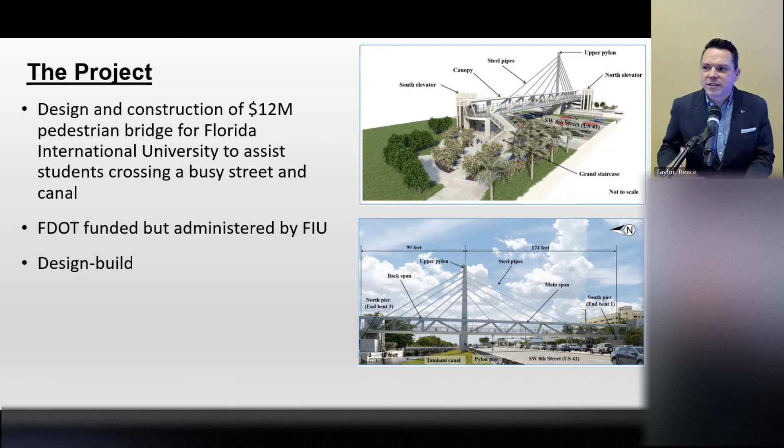And so that got the university thinking, how can we safely get our students from where they live to where they learn and then back home again? And this bridge was part of that solution. And it was funded with money from the Florida DOT. So you have the university and FDOT working as sort of co-owners, if you will, for this project. And together, they put this out for bid on a design-build basis.

And they selected their team, and that team consisted of a company called Munilla Construction Management, or MCM. They were the general contractor and the design builder for the project. MCM in turn hired FIGG as the prime designer and the structural engineer of record. FIGG in turn hired Louis Berger. Louis Berger did the peer review for the design.

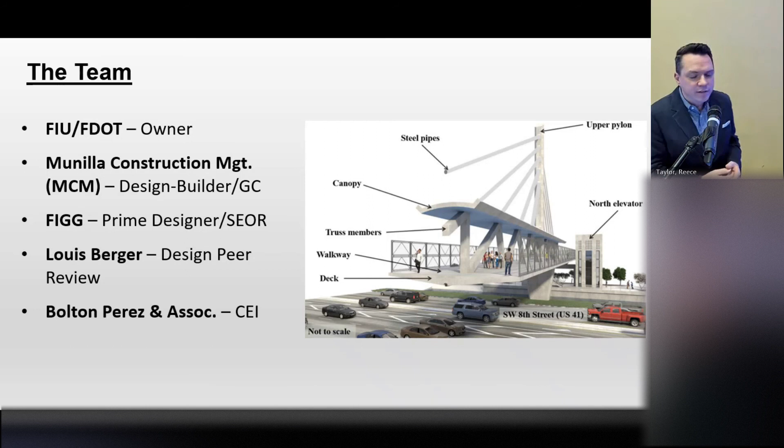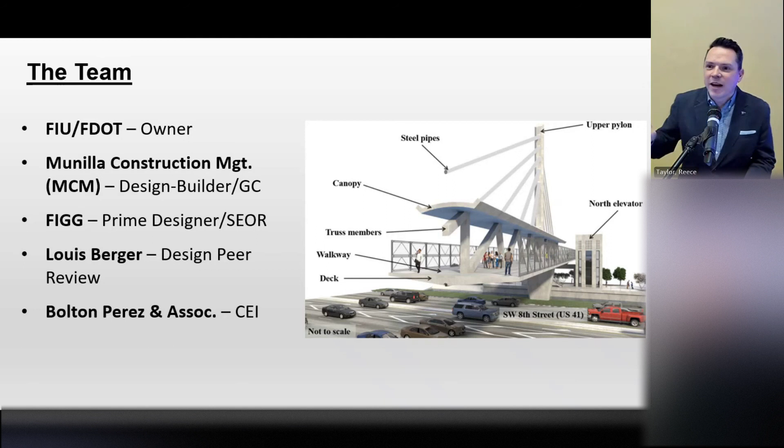And then you have a firm called Bolton Perez and Associates. They're the CEI firm. They were doing inspections, and they were doing their inspections under contract with the university and FDOT. They were working for those co-owners. That's going to be an important fact in probably about 17 minutes, so just sort of file that away. Bolton Perez working directly for the owner.

And they came up with this design for this bridge, a design that the NTSB, the National Transportation Safety Board, when they put out their report, said was a unique design. They said this was a highly complex design. They said that they could not find another bridge anywhere else in the world that looks like this bridge. And the fact of the matter is, it is a unique design. It is a highly complex design. And I'm going to trust the NTSB when they say they couldn't find another bridge anywhere else in the world

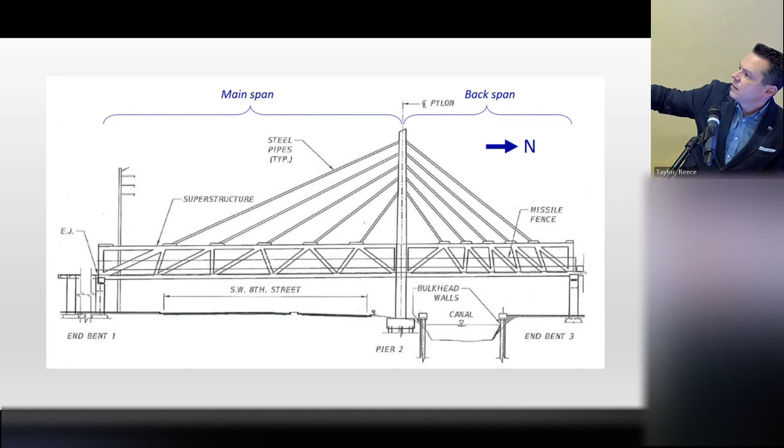that looks like this. But this bridge is not a cable-stayed bridge. It was intended to look like a cable-stayed bridge, but really, this was a truss bridge. All the support for the bridge came from a single concrete truss running down the center of the deck. Everything you see above the roof and the deck there, that tall pylon, those steel elements that are coming down, all of that is aesthetic. There was no structural support that came from those elements.

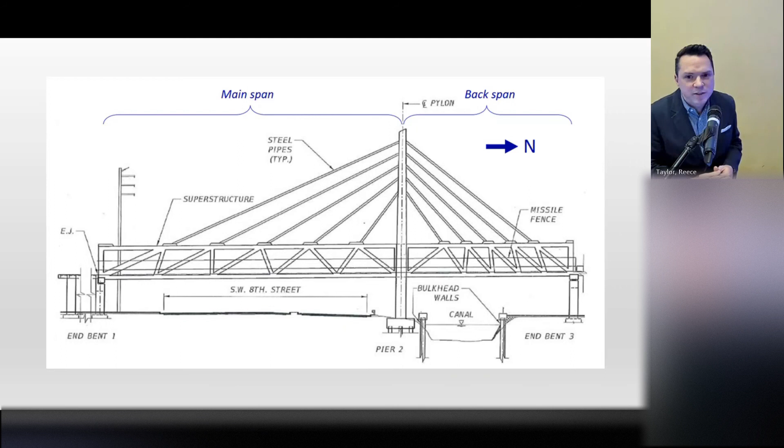And the fact of the matter is, my opinion, I believe the university wanted a signature piece. I think they wanted something to grab the attention of people who were driving down Southwest 8th Street. And they look up and they say, "What is that?" "Oh, that's Florida International University." "Oh, that's a cool looking bridge." Because it was. And I'm not saying that's a bad thing, keep in mind, but it was a unique design. It was a highly complex design.

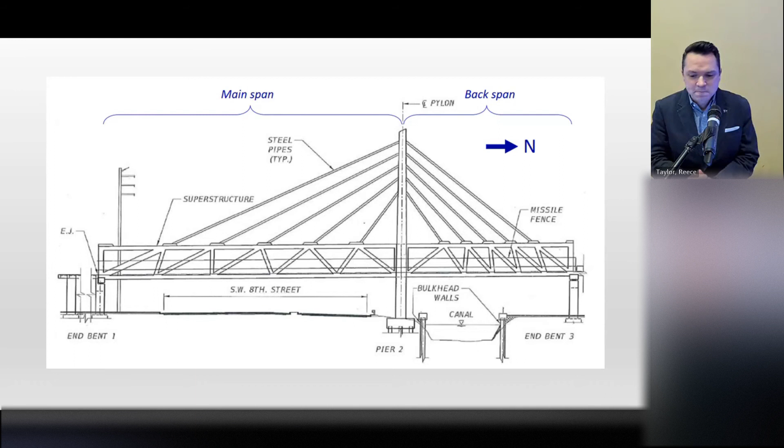And it was going to be constructed in 8 different stages. Today, we're going to talk about stage 3, because unfortunately, that's only as far as construction proceeded, and that is the erection of the main span.

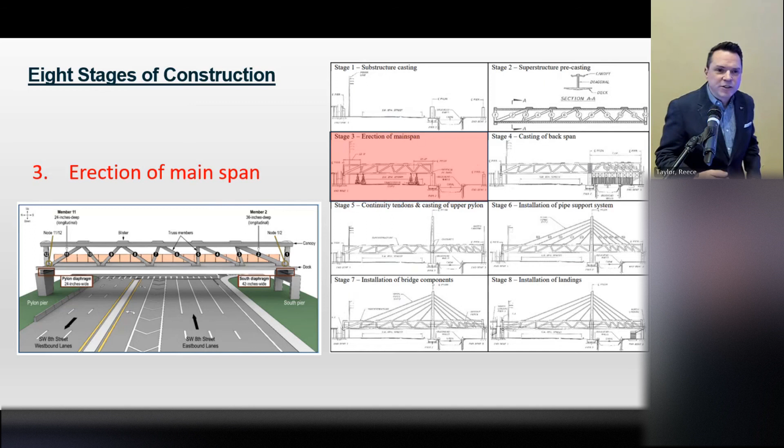The bridge was constructed using what's known as accelerated bridge construction, or the ABC method. This is a very common method of constructing bridges, and the idea behind the ABC method, if you're not familiar with it, is that essentially you cast pieces of the bridge off-site, you bring them into place at the last minute, and then hook them up. Again, not an engineer, but you essentially hook them up. And what that allows you to do is minimize disruption to traffic. So even at the outset of this project, there was a focus on minimizing the disruption to traffic. And again, I'm not saying that's a good thing, a bad thing, or otherwise, it just is.

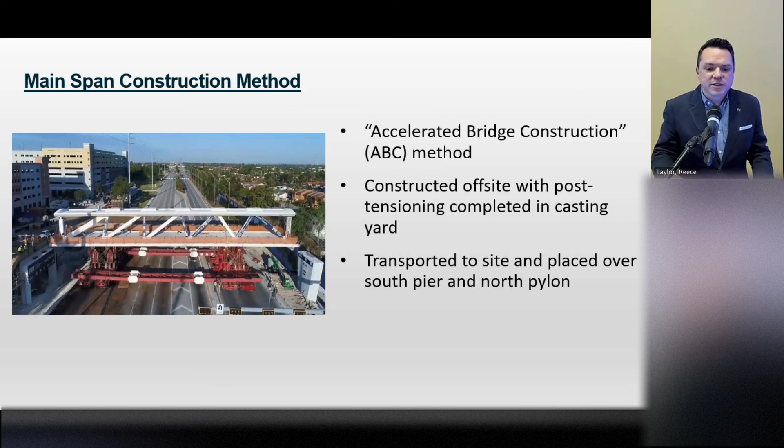So on March 10th, 2018, you can see a picture here of the main span being brought into place. Now, this was a big day for the project. This was a celebratory day. There were 6 PEs from FIGG who were there to watch this first very, very large piece of the bridge, seeing this project really kind of come into focus. The president of FIGG, she was there that day giving interviews to news cameras on the street. So again, there was a celebratory mood as this was happening.

And they brought in this main span. They set it down on the pier on one side, the pylon on the other. They inspected it. Everything looked good. So they removed the bracing, and shortly thereafter, they reopened the road to traffic.

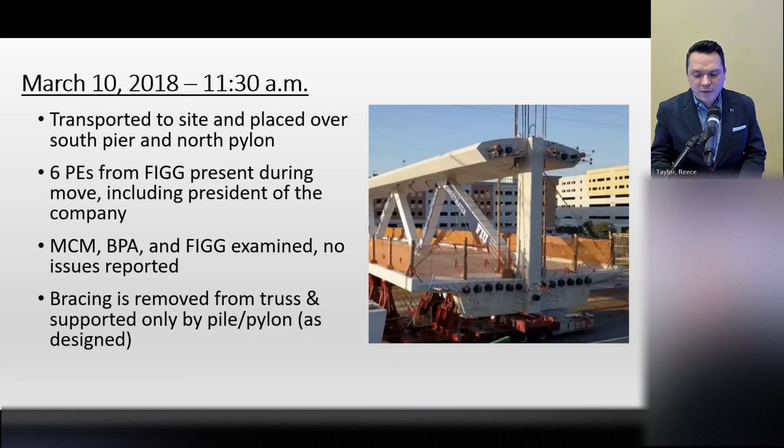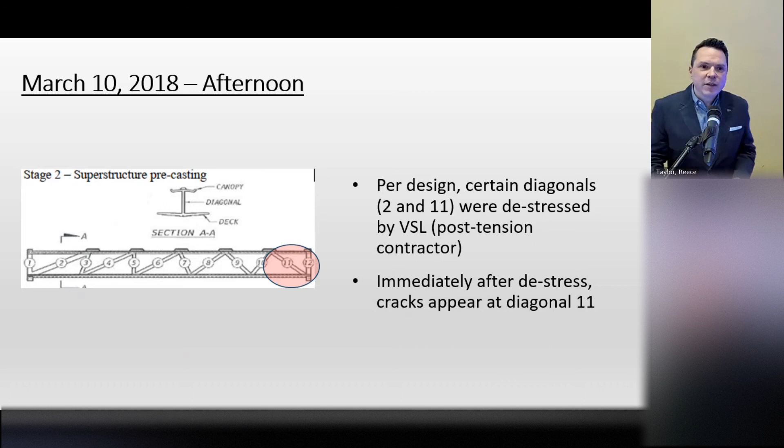That afternoon, per the design, there were 2 of the diagonals, number 2, which you can see on the far left, and number 11, which is highlighted on the far right. Well, all of these diagonals, all these truss members had post-tension cables within them. But the design called for the post-tension cables within 2 and 11 to be de-stressed once that span is in place, once it's supporting its own weight. So a company called VSL came out, they did that work, they de-stressed number 2, no issues. They de-stressed number 11, and then cracks started to appear.

Or in the words of the technician who was doing the work, he said, "It cracked like hell." That's a screenshot from his cell phone. He took these pictures, he sent it to his supervisor, and he said it cracked like hell. Span's been in place now for a couple of hours. And again, traffic is flowing underneath the bridge.

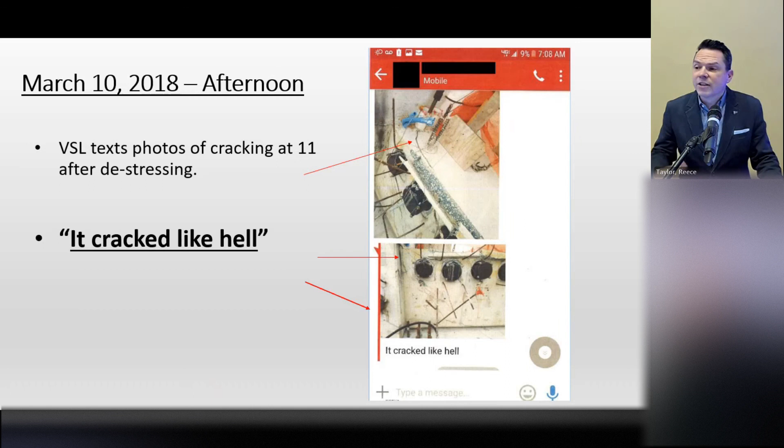Over the next day, some more cracks start to appear, all in that area between the connection of diagonal number 11, the vertical number 12, and the deck of the bridge. An MCM takes pictures of these, sends them to the structural engineer of record, and says, 'We need you to comment on this as quickly as possible.'

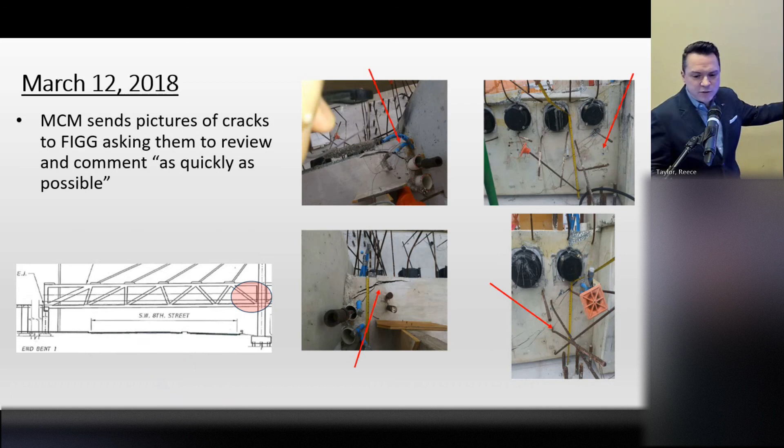Unfortunately, that email did not get opened until the next morning. But the next morning, the structural engineer of record opens the email. He responds, saying they need to put in plastic shims right away, but that no jacking is required. And he says, we do not see this as a safety issue.

Now, my guess, my assumption, my opinion is when people got that email and saw the structural engineer of record saying, 'we don't see this as a safety issue,' they probably did one of these and exhaled.

And said, okay, structural engineer of record says it's not a safety issue. What do we need to do now to fix the problem?

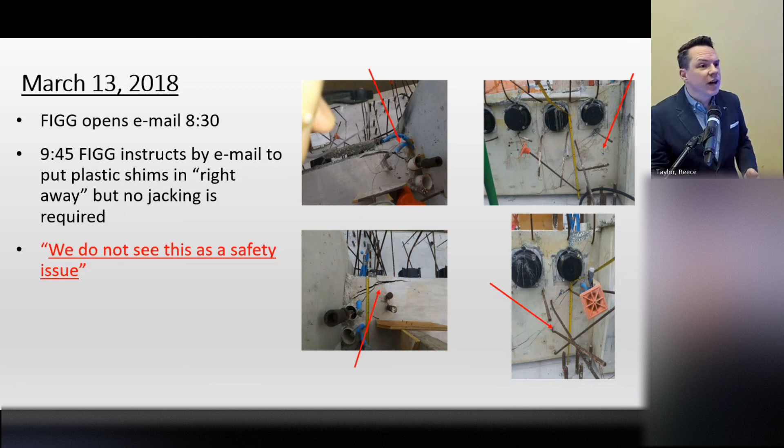Later on that same day, the structural engineer of record leaves a voicemail for his counterpart at FDOT, talking about the cracking. He says, 'but we don't see that there's any safety issue there, so we're not concerned about it from that perspective.'

That evening, he sends an email to the project team and says, 'we've evaluated further and confirmed this is not a safety issue.' But meanwhile, the decision is made that they're going to re-stress those post-tension cables in diagonal number 11.

Now, this was not part of the design. And when asked about it, FIGG basically said, 'we're taking a step back. We wanted to put the project basically one step back and see how it performed.'

The NTSB was very critical of this decision because they said this was not subject to peer review, and this is not part of the original design. Nevertheless, on that day, the decision is made that they're going to re-stress those post-tension cables.

And the company doing that, VSL, can't get out there until the 15th. So they scheduled that work on March 15th.

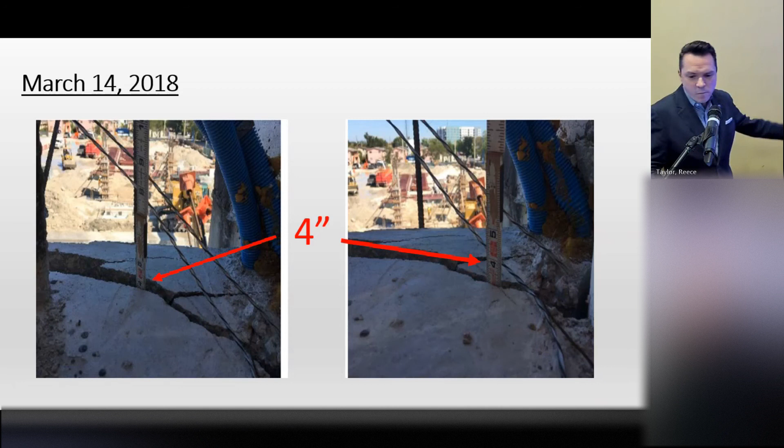Meanwhile, the cracks are continuing to grow. And again, this is all in that area between diagonal number 11, the vertical 12, and the deck of the bridge.

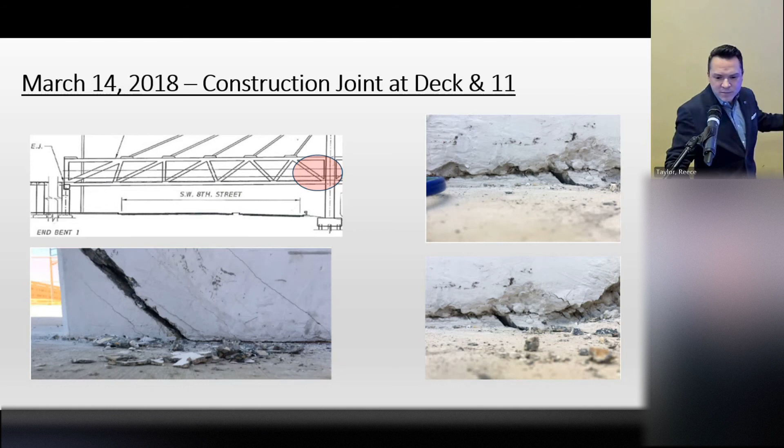Keep in mind, you have Bolton Perez, the inspections firm, out there measuring and photographing these cracks. MCM is out there too. Everyone is documenting this, and all the while, traffic is continuing to flow under the bridge.

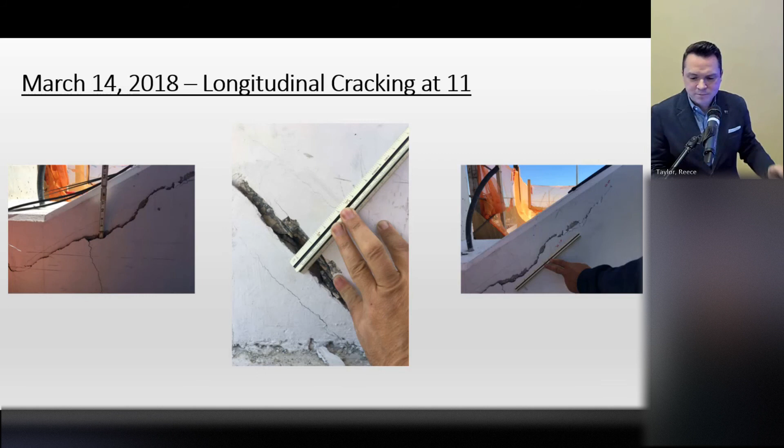So finally, on March 14th, MCM says, 'enough's enough. We have to have a meeting. We have to figure out what is going on. We want everybody to come together. We're going to meet at the project trailer. We want to hear from the structural engineer of record what is happening with these cracks.' So they call that meeting for the next day, March 15th.

Meanwhile, on the 14th, FIGG, the structural engineer, the prime designer, spend their day preparing their presentation for the next day. And VSL is also scheduled to come out on the 15th to do their post-tensioning work.

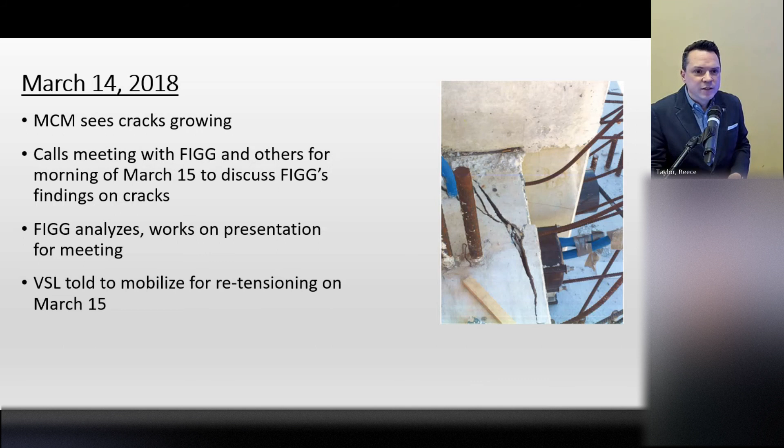That day comes. That morning, two engineers from FIGG, including the engineer of record, go out and walk the span, seeing these cracks for the first time in person. And they're being told that the cracks have grown.

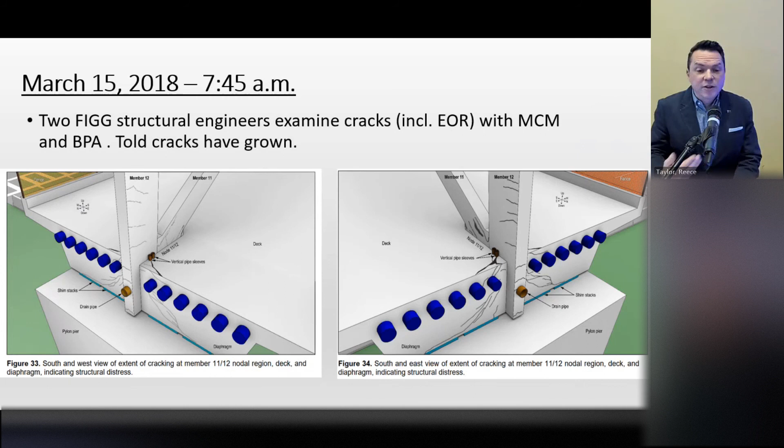So at 9 o'clock, they have their meeting, and everybody's there - the university, FDOT, Bolton Perez, MCM, and FIGG, of course. The structural engineer of record gets up and gives his presentation.

He says that the cracks look more significant in person, but that he has no safety concerns. He says it's a temporary loading condition and that he cannot replicate it by his own engineering analysis.

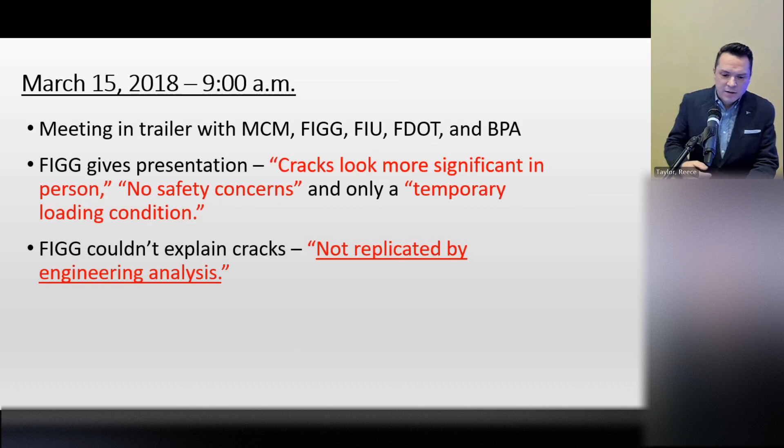Meanwhile, during that meeting, no one who was present expressed any concern with the safety of the span. No one recommended that they close the road to traffic, because perhaps 100 yards away from where they're having that meeting in the trailer, traffic is continuing to flow under the bridge.

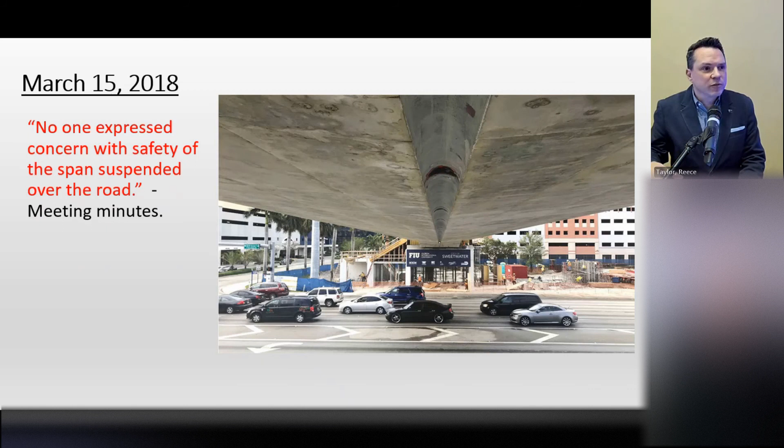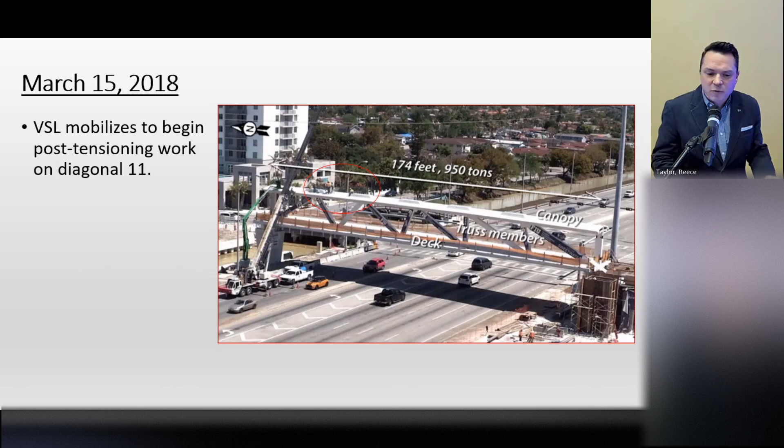And meanwhile, VSL now is on site, they've mobilized, and they're starting their work - which takes us to 1:46 p.m. on the 15th.

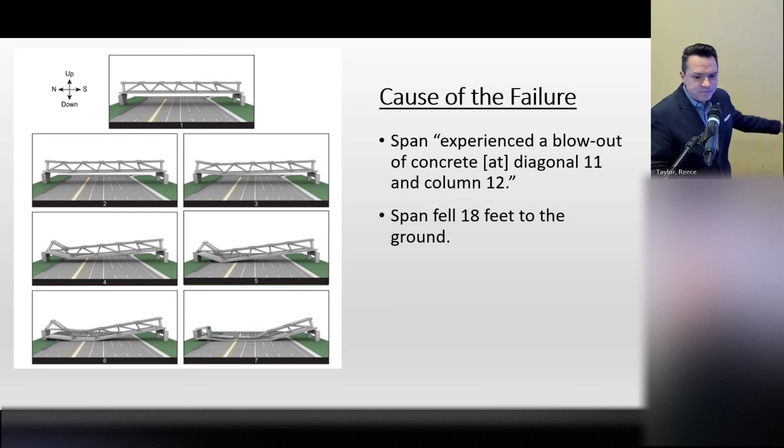Because in that moment, 6 people were killed. There were 5 motorists and 1 technician from VSL who were killed. Another 10 people were injured: 5 workers, including 1 worker from VSL who's permanently disabled. You saw a screenshot of his cell phone earlier. Additionally, another 5 motorists were injured. All of those individuals and their families, their lives were forever changed because of that moment. That's the personal impact. That's the very, very real impact of what happened.

We're going to talk about the professional impact next. And I want to make it very clear, there's no comparison between a family losing one of their loved ones and a firm having brand reputation damage. Nevertheless, because we are part of this profession, we are going to talk about the professional impact as well.

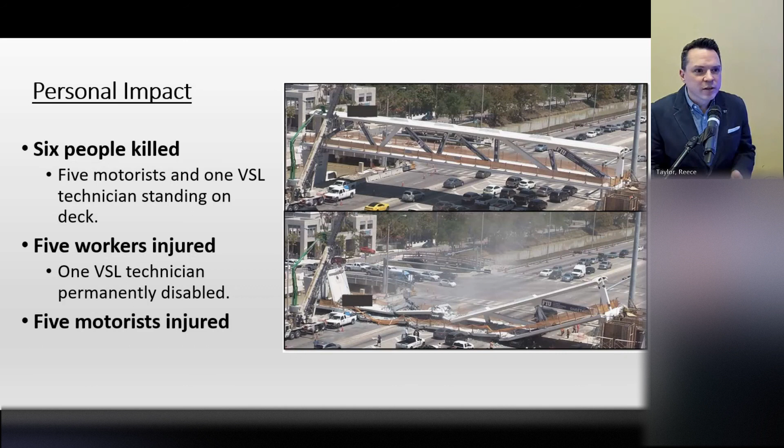That professional impact largely came in the form of lawsuits from victims. You had 2 government investigations, a PE board investigation, and then reputational harm for each of these firms. We're going to take these in turn.

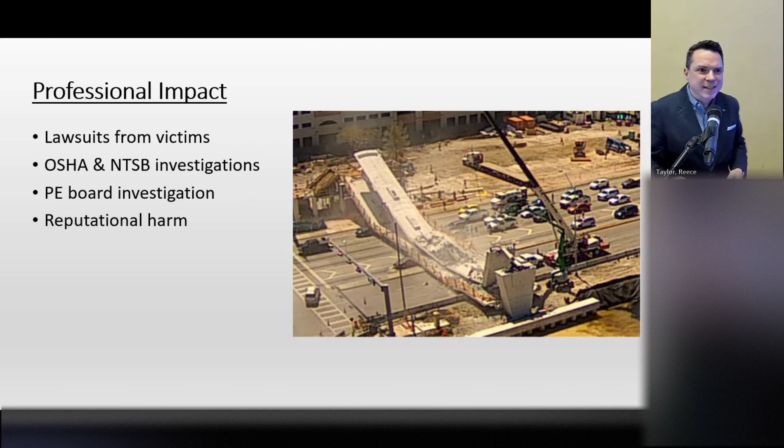The lawsuits actually went pretty quickly. The reason for that is because this is not a lawsuit you really want to be a part of, and it's not something you want to spend a lot of time trying to defend, even if your work isn't necessarily to blame. If you're part of this project and 6 people died, you're going to look to settle. And that's what happened. Collectively, 25 different parties who were part of this project came together and paid a total of $103 million to the families of the victims.

Additionally, another $9.5 million was repaid to FIU because essentially they did not get the bridge they paid for. Everyone involved in the project, with one exception, took part in that settlement. The one exception was Louis Berger, the peer review firm. We're going to talk about, in my opinion, why they decided not to take part in this settlement, but they went their own way.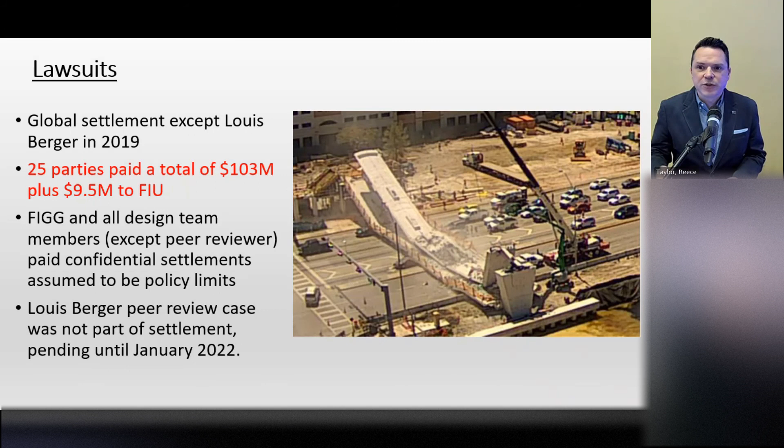The lawsuits continued against them for a while, up until about January of 2022. Of that $103 million, we don't know who paid what exactly—those settlements are confidential. The only reason we know the total is because it came out in a bankruptcy filing of one of the parties. What we can assume, my best guess, is that because this was ultimately found to be a design flaw, and it was, the design team presumably paid policy limits to resolve the cases against them.

Now, as I said, there were 2 government investigations: one from OSHA and one from the NTSB. The NTSB had a hearing on this, and if you're interested, it's online—you can watch it on YouTube. It starts with the chairman of the NTSB saying the bridge was talking to them.

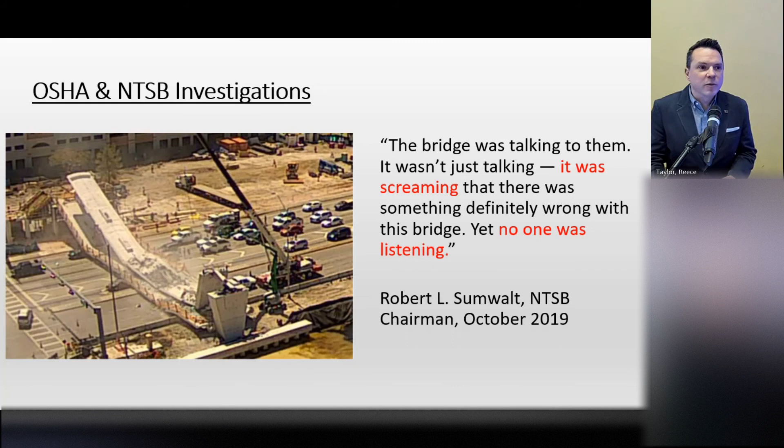It wasn't just talking, it was screaming that there was something definitely wrong with the bridge, yet no one was listening. It's not a great way to start a government hearing, and it did not go well for them from there, because they did find that there was a design error as the primary cause of the collapse. Additionally, they cited the peer review firm, Louis Berger, for failing to include the staging design in their work. But they cited everyone for failing to stop the work, failing to close the road.

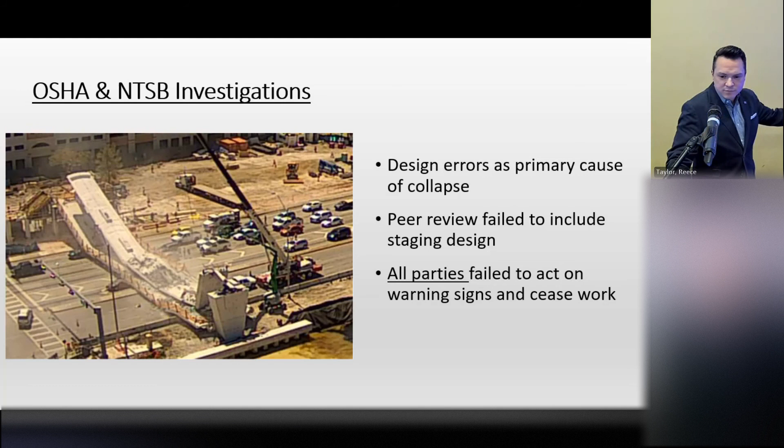With regard to the peer review, 1 second here.

With regard to the design flaw, the NTSB determined that the design underestimated the loads at that connection between 11 and 12 at the deck, that area we've been looking at where all the cracking was occurring. And the design overestimated the capacity to resist shear because of the incorrect load calculations.

Also, they found that there was a lack of redundancy in the design. And if you think about your average truss bridge, number one, it's probably not made of concrete to begin with. That's not to say that it can't be, but more often than not, a truss bridge is probably going to be made of steel. And more often than not, if you look at those truss members, if you look at the triangles that are formed, those triangles are usually, if not identical, there's usually some symmetry there. In this case, you didn't have that.

To keep that look of a cable-stayed bridge, you had the truss members at all different angles, all different lengths to kind of complete that look. But again, if you think about your average truss bridge, there's probably a truss on either side of the deck, usually tied in together. Well, this had a single truss running down the center of the deck. And the NTSB cited the design for a lack of redundancy.

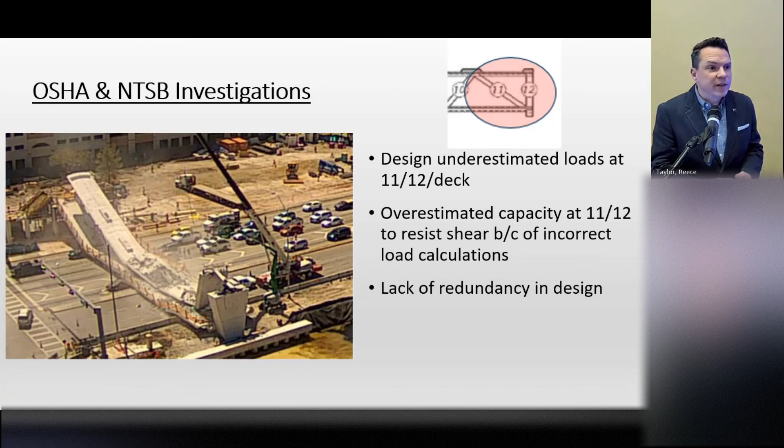FIGG tried to argue that because there were multiple post-tension cables within each truss member, that gave them some redundancy. And the NTSB said that doesn't work. And they said, we know it doesn't work because once that single truss member, number 11, once it failed, the bridge failed. So they were cited for a lack of redundancy as well.

With regard to Bolton Perez, the CEI firm, they were cited by both OSHA and the NTSB for not stopping the work, for not exercising their own independent engineering judgment. OSHA pointed to their contract and said, you have a requirement in your contract to exercise that independent professional judgment.

And the NTSB went a step further. The NTSB said, because you are working for FDOT, you, Bolton Perez, have an obligation to go out and close the road unilaterally. You are an extension of FDOT. You should have closed the road.

I don't know that I've ever come across a CEI firm unilaterally closing a road. But nevertheless, that was the NTSB's determination because they were working directly for FDOT, even though FDOT did not express any interest in closing the road. Bolton Perez should have, and they were cited for that.

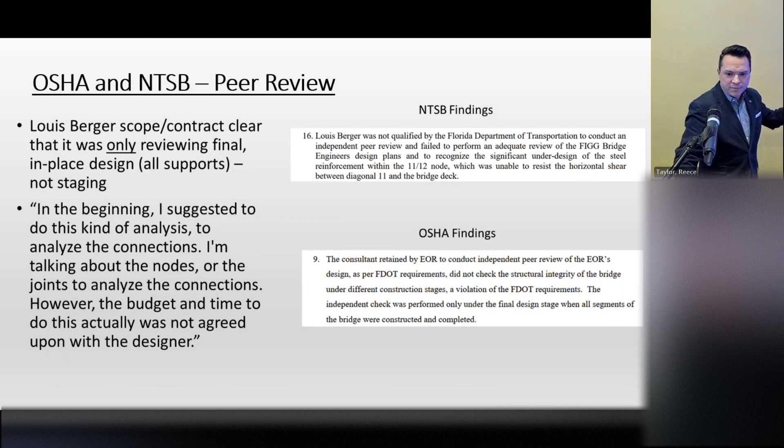With regard to Louis Berger, the peer review firm, they were also cited. And they were cited for not doing a comprehensive peer review, not looking at all of those 8 stages of design. The response that Louis Berger gave was, you're absolutely right, we did not do that because we were not hired to do that.

I have a quote here from the engineer who worked on this, and he said, in the beginning, I suggested to do this kind of analysis to analyze the connections. I'm talking about the nodes or the joints to analyze the connections. However, the budget and time to do this actually was not agreed upon with the designer.

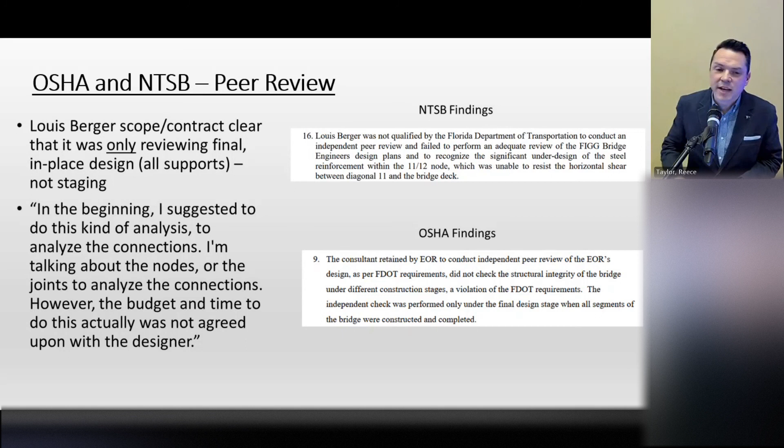So who hasn't been in that situation before? Where you tell your client, look, I want to do this. This is going to give you the best finished product. And the client says, well, I only have the time and money for this. And they said, okay, to do that, it'll be $110,000. And the response was, will you do it for 60? And they said yes. So in the end, Louis Berger was paid $60,000 to do a peer review of just the final in-place design.

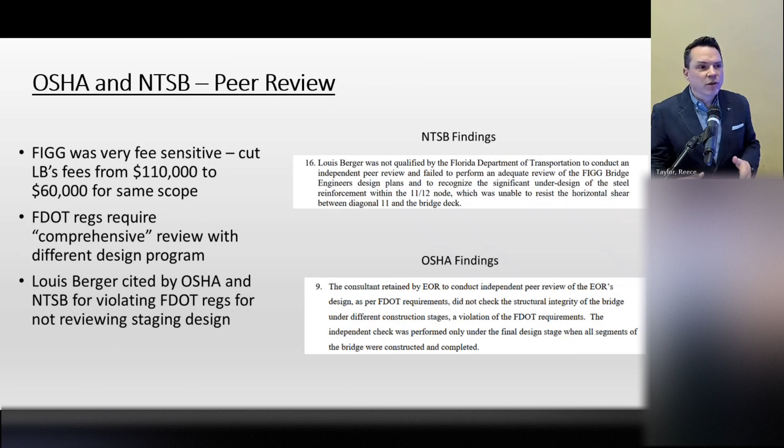The problem here is that FDOT regulations require a comprehensive peer review to look at all of the stages. And so at the end of the day, Louis Berger was cited for not doing the work that they weren't hired to do.

With regard to the PE board, shortly after the collapse, this statement went up on the Florida Board of Professional Engineers website. Essentially what it says is, we know this happened, we know there was a collapse, we know there are 2 government investigations looking into it. And if it is found that there is a design error that is the cause of the collapse, we will take all appropriate steps. So those investigations concluded.

They did find that there was a design error. What happened next kind of happens behind closed doors. You don't really get to hear a lot about how PE boards run their investigations, what they look at. Sometimes you have to read between the lines and you can only see the outcome. In this case, the outcome is that the structural engineer of record voluntarily relinquished his license in 2021. For anyone in this room who is a PE, you know how hard it is to get that license. At least in my world, as a licensed professional, it's been my experience that people do not voluntarily relinquish their license unless they know someone's going to take it from them. Nevertheless, the structural engineer of record voluntarily relinquished his license in 2021.

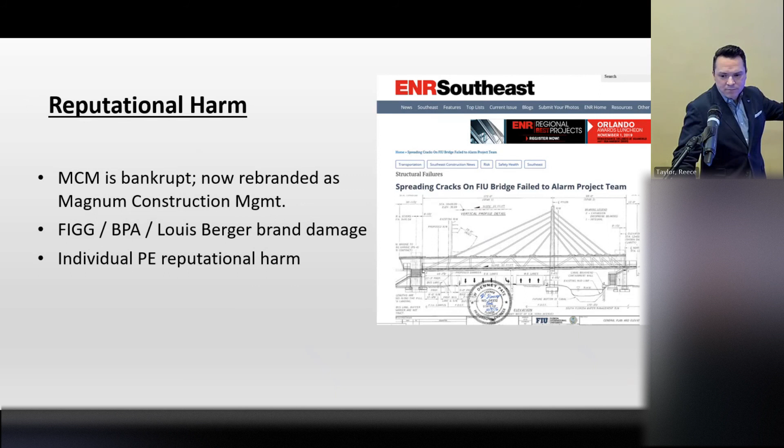But there's actually some continuing fallout. After the first round of lawsuits with the families of the victims wrapped up, there was another round of lawsuits. MCM sued Louis Berger, and they actually sued WSP, who bought Louis Berger after the collapse. WSP had no connection to this project whatsoever, but they acquired Louis Berger after. MCM sued them both, basically saying that the $9.5 million that they had to repay the university should really come from Louis Berger and WSP as the peer review firm.

I have a quote here from the president of MCM who says, "We saw the concern. Every day they documented it. We were assured by a world-renowned designer that it wasn't a safety concern." Now, I have a couple of problems with that statement. Number one, yes, it's true, they were assured by a world-renowned designer that it wasn't a problem, but that wasn't Louis Berger. That was FIGG. Louis Berger had no part in these conversations whatsoever. The other part I have, and this is probably just more a personal gripe than anything else, is the fact that they're the design builder. They own all of this project, and yet they're very, very quick to try to blame this on the designer. I do have a problem with that.

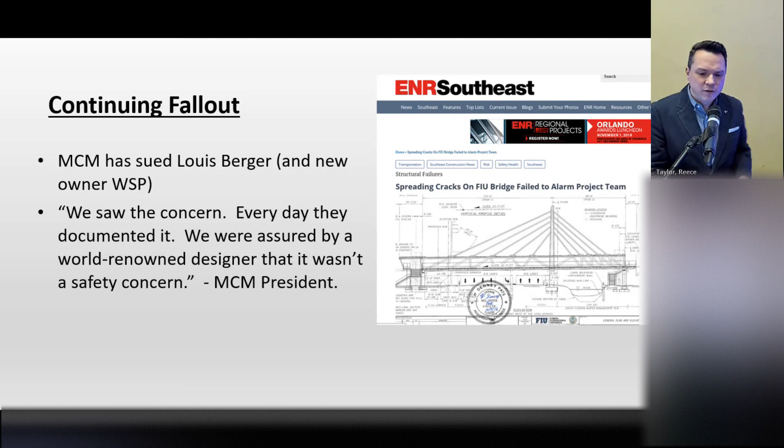That lawsuit went on for about 9 months, and it was settled, I believe, in late 2022. And for terms I don't know, unfortunately, it's confidential.

But with regard to Louis Berger, if you remember, I said the lawsuits from the families of the victims—Louis Berger went their own way, and I can't sit here and tell you exactly why, but I can guess that they're looking at this saying we are the farthest removed as the peer review firm, we're the farthest removed from anything that happened on that project site, and we're going to try and go our own way, and we're going to make these families prove their cases against us. I could see someone being talked into that. And they did that for a while.

As they started to get closer to trial, things started to change and they started to go very badly for them, quite frankly, because the judge in one of those cases made a determination that when it came time to present this case to the jury, they were going to let the jury decide whether or not to award punitive damages. I'll tell you a couple things about punitive damages. Number one, and this is going to be really obvious, but they're intended to be punitive. You don't look at the harm that's caused, you don't look at the damage. More often than not, you look at the profits of the company and you take a percentage of that.

It is intended to really, really hurt. The other thing about punitive damages is that they are rarely covered by your insurance, because to have punitive damages, you basically have to be grossly negligent. And an insurer is not going to insure gross negligence. They're going to insure common negligence. So Louis Berger is looking at this saying, we are facing potentially a very, very massive damage award that may not even be covered by our insurance.

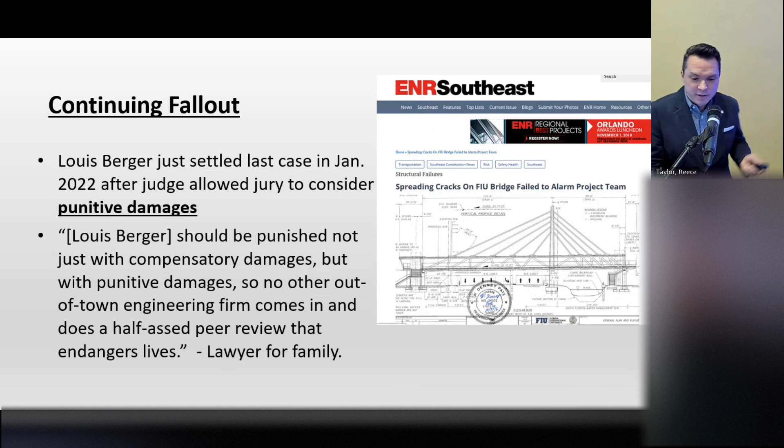But for all of the project participants, I don't think anyone has been more affected than FIGG. Shortly after the NTSB's report came out, FIGG was pulled from 2 Texas DOT projects, 2 very high-profile projects. And Texas DOT made it very clear why they were replacing them. They essentially said this is because of the FIU bridge collapse and because of the NTSB's findings.

Additionally, FIGG was hit with a 10-year debarment from the Federal Highway Administration, FIGG and the structural engineer of record individually. If you're not familiar with that term debarment, essentially what that means is FIGG cannot participate in a job that involves federal money. And this is a firm that specializes in bridges. Not a lot of private bridge work out there, quite frankly.

And the president of the company has said that if they cannot get this debarment overturned, and they've not been able to so far, that it could very well be the end of FIGG. And again, I'm not saying that's good, bad, or otherwise. I'm just saying it is.

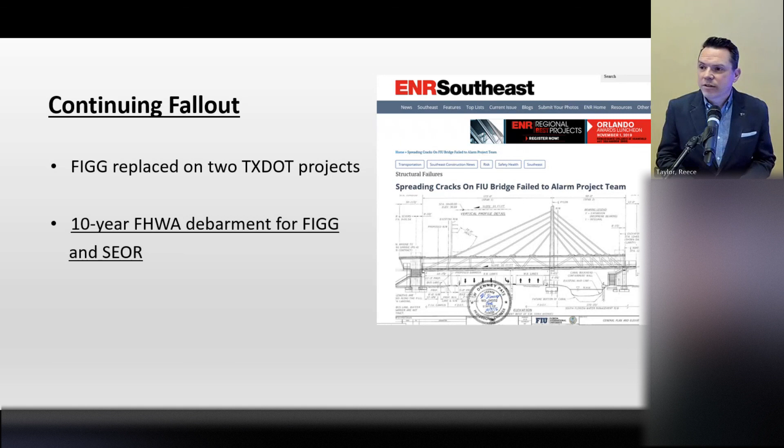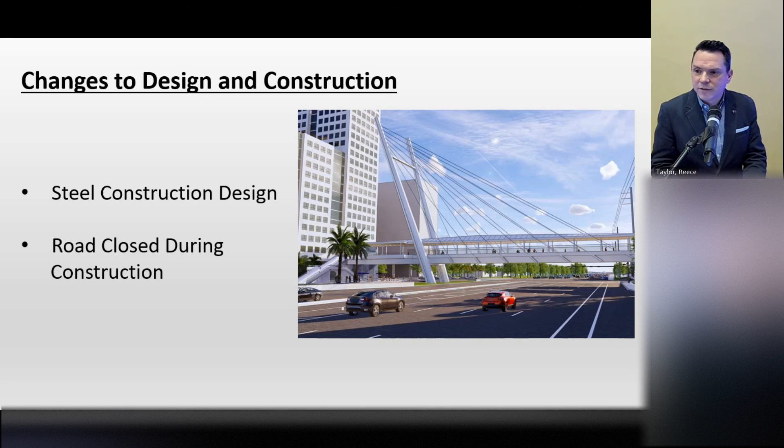Meanwhile, the university still wants its bridge. And so this rendering came out a few months ago. It shows what the new design is going to look like. And there are going to be some changes. It's going to be constructed out of steel, and the road's going to be closed during construction. So it does appear there have been some lessons learned.

Now, this is the part where we get a little bit of audience participation. I have a question, and I'm asking for a show of hands. Bolton Perez, the CEI firm working directly for FDOT and the university, they were cited for not stopping work. Who thinks it was appropriate? Who agrees with the fact that Bolton Perez was cited for not stopping the work? Show of hands. Okay. Who does not agree with that? Who thinks they should not have been cited? Would you mind sharing your thoughts? We have a microphone here.

I'm not totally familiar with the CEI term, but it seems to me that they were an inspector. They didn't have authority to shut the job down. That's the way I see it. Maybe their responsibility may be greater than that, but the way I see it, they inspected and reported. They do not have that authority.

And so I would agree with that. Their role is to inspect, it's to inform, it's to pass that information up to what I think are commonly referred to as the decision makers. And I think in this case, the issue that really was kind of the turning point was the fact that they had professional licensed engineers involved in this work. And the determination is every engineer has their own independent obligation to protect the safety of the public. And so in this case, they said that Bolton Perez did not do that.